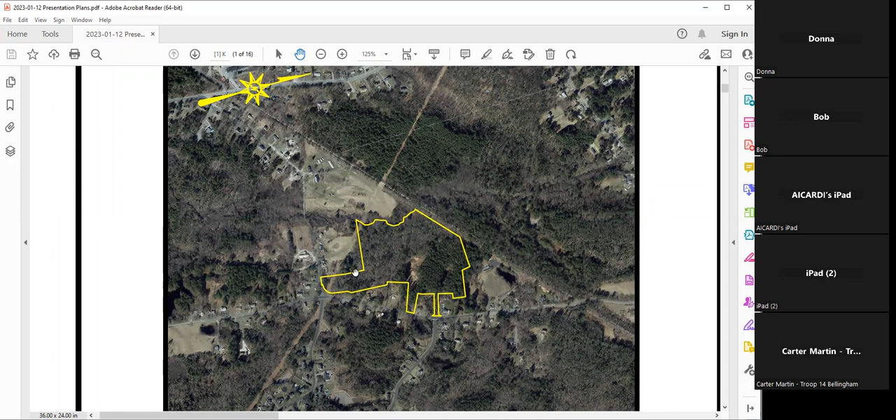Thank you, Mr. Chairman, members of the board. My name is Dan Merrican with Legacy Engineering here on behalf of the applicant. We've submitted an application, as you indicated, for definitive subdivision approval and a stormwater management permit for a 6-lot, single-family residential subdivision. It's located on a piece of land that you can see here on the aerial photo, between 336 and 340 Lake Street. For those people in the audience, it's being shown behind you as well.

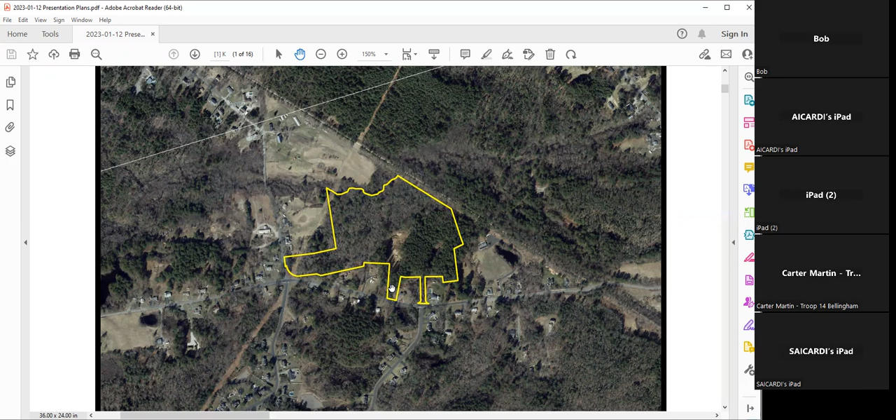The property is undeveloped in its present condition. On the southerly, southwesterly portion of the property, there's a river, Peters River. There's an associated wetland system, floodplain. We're not proposing to do any work within those wetland areas or the floodplain or the riverfront area or anything like that. There's also wetlands on the north side of the property. What we're proposing to do is use the middle of the property, this area in here, to come in with a road.

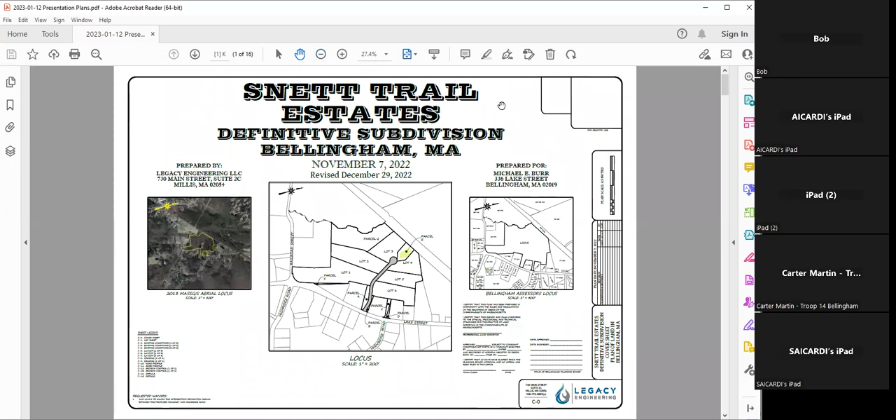Just back out, I'll show you a little bit of the existing condition. So I'm going to go from south to north. So this is the south end of the property that extends all the way up to Railroad Street. You can see there's a lot of wetland here. None of this is really usable or developable. There's a little bit of upland here. But as we get back into the site proper,

this is where we have basically two fingers of land that come out to Lake Street. We have one that was clearly left as a road entrance opposite High Ridge. Unfortunately, though, it has wetland areas, so it's not a good option to bring a road in. And then we have this second area here to the left, which has upland areas where we can bring a road through. So we selected that location for our proposed road.

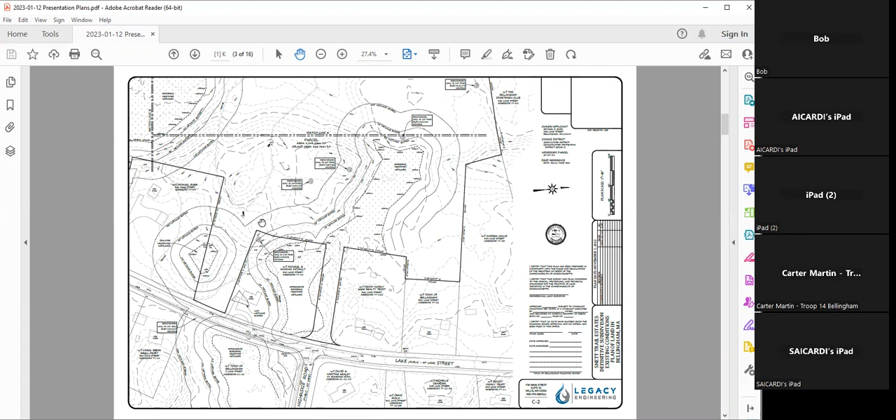We are zoned agricultural. We're in the Zone 2 Groundwater Protection District. Lot size requirements are 80,000 square foot minimum, 200 feet of frontage. And what we have proposed is 6 lots. So this would be a lane under your regulations, so 40 feet wide with 22 feet of pavement, 1 sidewalk, Cape Cod berm. We would come in off of Lake Street.

There's a little isolated wetland here on the left. There's a bordering vegetated wetland on the right. We come in between those 2 areas so that we don't have to disturb any of those areas. And then we would have 3 lots on the left and 3 lots on the right. At the end of the cul-de-sac, we have separate parcels set aside for our stormwater management system.

The road is 878 feet long. We have a 100-foot diameter cul-de-sac with 80-foot diameter paved area as required by your regulations. I'll show you a little bit of the profile. This is the profile of the road.

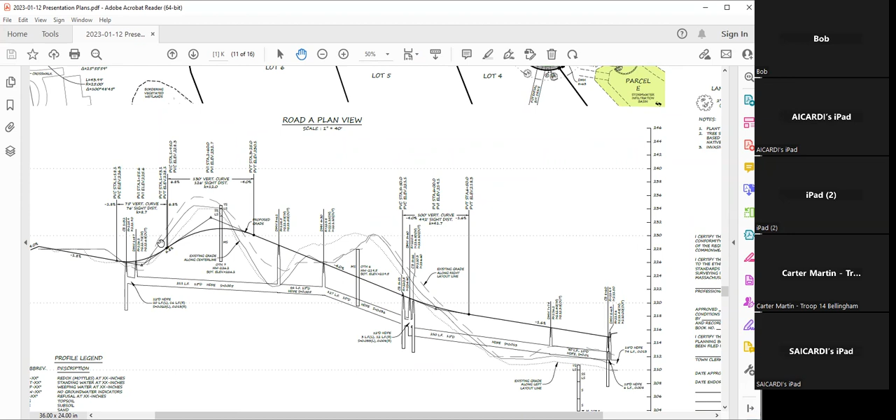You can see the topography; the profile view is exaggerated tenfold, so it's not nearly as dramatic as this. But you can see that it comes in off of Lake Street, goes down, goes up over a hill, then goes down again, then goes up over another hill, and then goes down. So we basically came up with a proposed road profile that balances those cuts and fills and gives us a middle ground there.

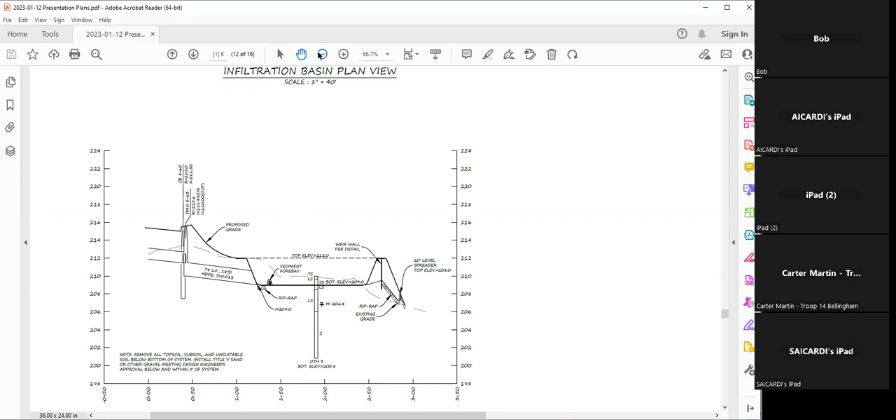At the end of the cul-de-sac, we have a stormwater management basin, which is an infiltration basin. That's going to discharge out into the wooded area towards the south. There's hundreds and hundreds of feet of woods there, and that leads down to Peters River. We have provided you with a comprehensive stormwater management report. It addresses all the requirements of your regulations and the DEP stormwater management standards.

We have a system of catch basins, manholes and pipes that collect runoff from all of the road areas. You can see those in the profile here. They will collect runoff from the road areas and pipe it to the cul-de-sac. At the end of the cul-de-sac, it will discharge into the shallow infiltration basin. So we have pre-treatment with catch basins and a sediment forebay, and then final treatment with the infiltration basin. We have no increase in peak rate or total volume of runoff in any design storm.

Those are the highlights. Our stormwater report includes all the usual elements, O&M plan, SWPPP, TSS removal calculations, all of the things that are required for a modern stormwater management design and report.

We're asking for one waiver, which is our intersection separation distance. As I indicated, we have an entrance. It's not quite directly opposite High Ridge; it's actually a little offset. A different location is not a good option because it would entail the disturbance of wetland resource areas, which we want to avoid. So we've proposed the road entrance in this location, which is 320 feet from High Ridge Road, whereas the regs require 400. So we're asking for that one waiver on that topic.

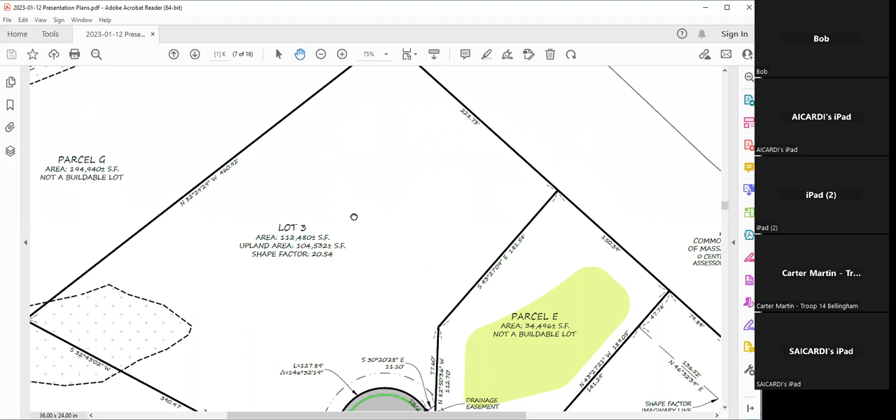We will most likely run concurrent with the conservation department. Makes sense. What's the size of your retention pond, Marty? The size of the parcel? Yeah. It is 34,496 square feet, about 3/4 of an acre.

You're just doing wells for everybody? It was our plan to do a well and a septic system on each lot. Are you selling the lots off and developers are going to buy them, or are you developing it? Well, I'm not doing anything. Right, I understand that. I don't think the owner is going to develop the subdivision, but I'm not sure. Yeah, that's my issue. Say I was to go in and want to buy a lot and develop it, and I want town water.

Yeah, I mean, that's gonna be, some people like wells, right, so it kind of goes both ways. I mean, again, there's no way to loop the dead end. Well, I'm just wondering what kind of infrastructure you're gonna offer these people when they buy their lot, when they develop their home. That's what I'm wondering.

Well, I could certainly explore that with the applicant. I mean, is the board amenable to a waiver on the issue of looping, given that there's no way really to do it? We'll discuss that after we all have comments. Fair enough. I don't think it's appropriate right now to answer that. Mike, are you done? Yeah.

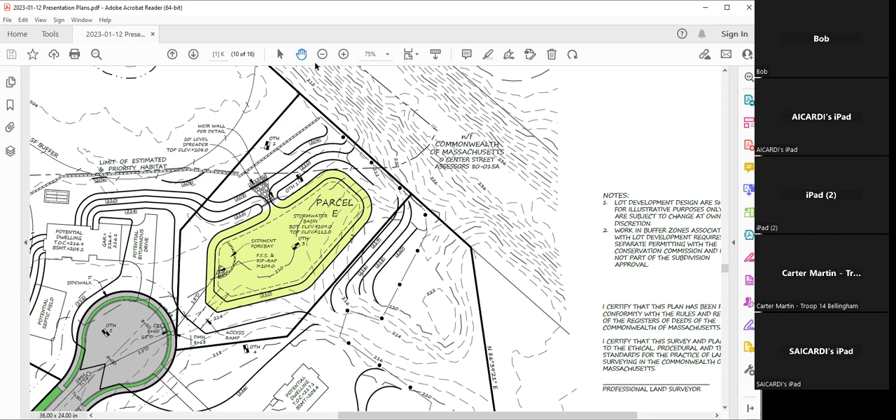So we basically tuck this basin in, getting it into this slope a little bit. But we're gonna be sliding this basin back a little bit more towards the road, so it will be less in that slope. Okay, perfect, because if it intercepts groundwater... How do the contours work back there? It looks like the trunk line trail, I believe, is higher than the basin. Yeah, it's a big hill. And does it continue to go up due east? Everything drains right here, right down through here.

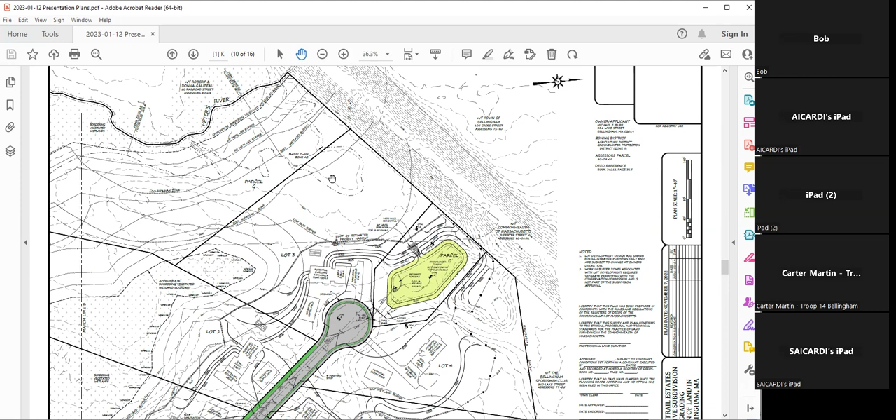You see this line here, this is the floodplain boundary. Gotcha. So this is Peters River. This area here, there's actually an old cart path that comes along and crosses over Peters River. There's a bridge right here. And this whole area drains down through this area here and then down to the river. Gotcha. And this is all wooded, undisturbed. Okay. And this is a big hill. Yeah.

All right, so if you're revising the drainage basin design a little bit, I'd be interested to see where it falls in the cut portion of that slope. And one thing, as we move forward with the process, if there comes a time to draft a favorable decision, maybe there can be a condition during construction to do exploratory tests in that area, just to have somebody out there from the town to make sure that there isn't any mottling at the surface or something.

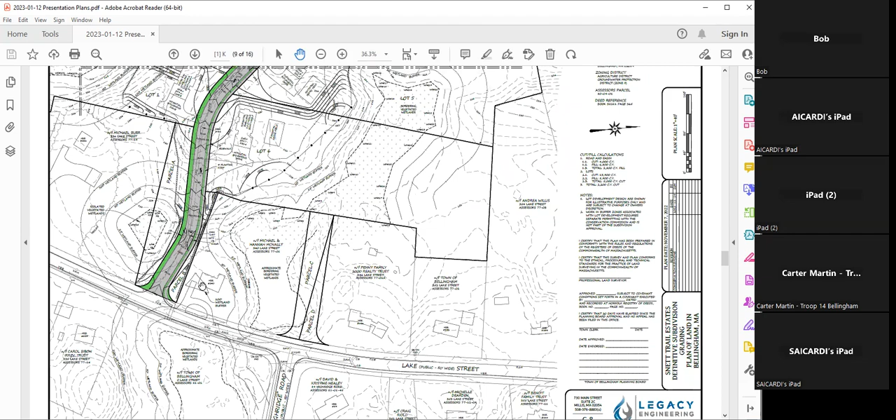And the one other question I had was regarding the curb cut on Lake Street. I know you're requesting a waiver, which makes complete sense to make sure that you don't have an exorbitant amount of wetland disturbance. Just out of curiosity, there's no sightline issues on that curve? No, we have about 450 feet to the north and 700 feet to the south. Okay, perfect. Good sightline. Absolutely. So that's all I had for now. I'd be interested to see what the peer review comes back with.

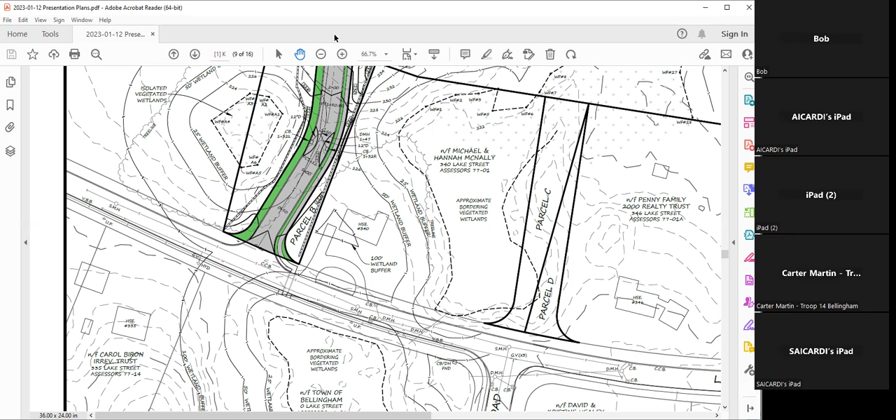Two questions. I know that lot or parcel E, we just talked about that. What are the other ones? They're gonna be given to other people. So let me just show you this.

So this is our other right of way. It's useless land. The lot shape factor means we can't really put it in with another lot. So it's gonna be split in half, and I think it's gonna end up going to adjacent property owners. And then, can't really see it there.

This little triangle here, parcel F, that's gonna end up being a land swap between the applicant and his neighbor. So at some point, we'll be in for an A&R on the house lot to the right, and that's just gonna end up being a land swap between the parties. So we're just creating those in the subdivision plan now to make life easier. So talk to me about that.

So if you were to slap on parcel C to the adjoining other parcel, it wouldn't work for the lot shape factor? To lot 6, I don't know the number. Yeah, to our lot 6. Yeah, right there. Yeah, these long tails mess up the lot shape factor. Well, let me ask you this. If the idea is, we'll put it in and then later on we'll just give it to parcel 6, aren't we creating something that doesn't comply with zoning? Not to parcel 6. I believe they're gonna be conveyed to abutters. To either parcel C or D or whomever?

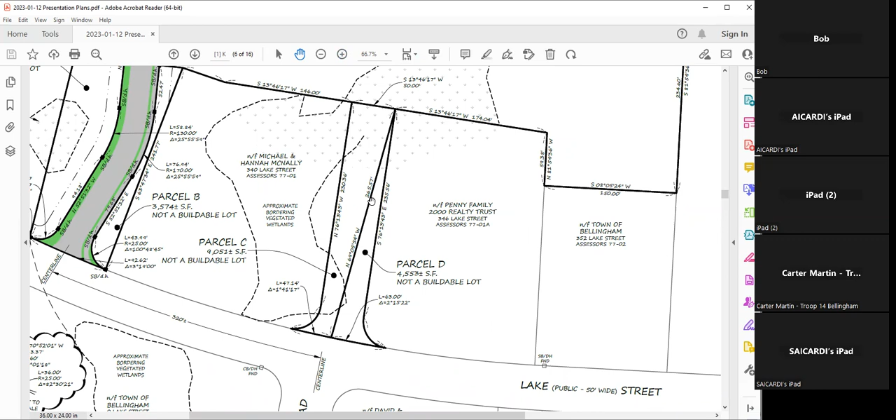And I don't know all the details around this, but you have 340 Lake Street to the left, and you have 346 Lake Street to the right. I think they're gonna end up with those people. Oh, I see. Okay, it'll be splitting. Okay, I get it. All right. I can get further clarification. Yeah, if you don't mind.

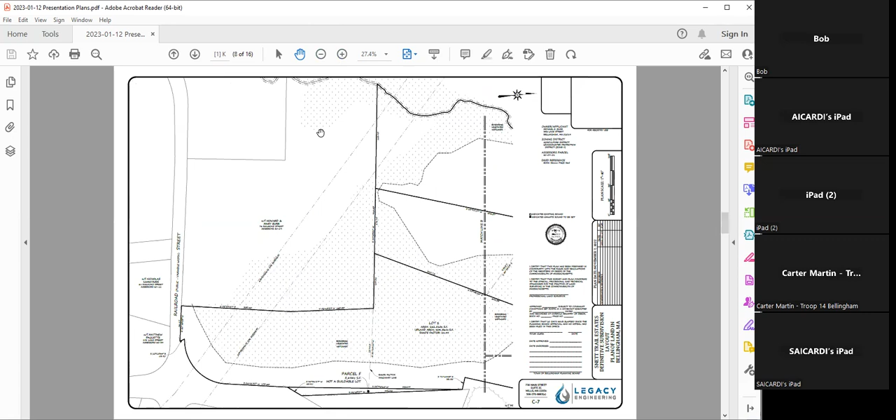And then, could you explain a little bit about why a loop doesn't work in this particular case? Yeah, so there's nowhere to go with it. Let's just look at the end of the road, right? So we have the SNETT Trail here. You can't go south because you have wetlands, floodplain, riverfront area, and a river. You can't go west. You cross the trail, the old railroad bed, and the river's there. There's actually 2 rivers right there. So coming across that way there's nowhere to go with it.

And if you go north, you got wetlands over here. There's nowhere to go with it. So explain that to me. So the idea would be to create a loop in the pipe so nothing goes out and stays there, right? Is that what it is? Well, no, so the issue with dead end pipes is you can get water quality issues. Because there's not enough flow through the pipe. No, you have 6 houses attached to it. There's gonna be flow through the pipe. There's always flow through the pipe.

But people who operate water systems don't love dead ends because you can get stagnant water quality issues. So I'm sure that's the genesis of why the language is in your regulations about it. And I will talk to DPW about the wells versus the water main situation. And maybe there's a middle ground there where, if the fire department wants a hydrant halfway down the road, we can keep the dead ends as short as possible, provide that hydrant to the fire department, and put a couple of houses on the main or something like that. Maybe there's that middle ground.

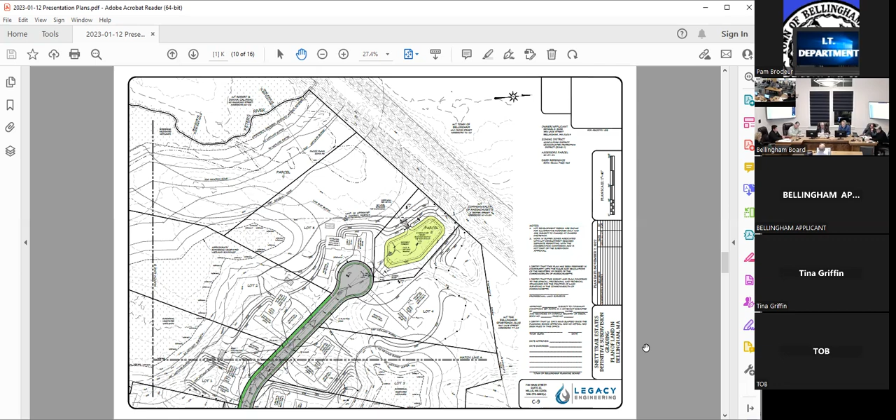So what I'd like to entertain now is how long it would take you to do this. I think our schedule would be February 23rd. Does that give you enough time? Yeah, it's really the peer review that's gonna take the time. February 23rd is probably the right day, because that gives peer review a chance to get done and then me to respond. That would be the second meeting in February. So I would entertain a motion for continuance to February 23rd, based on meeting with the DPW, fire department, and stormwater peer review. Do I have a second? Second. All in favor? Aye. That motion passes unanimously.